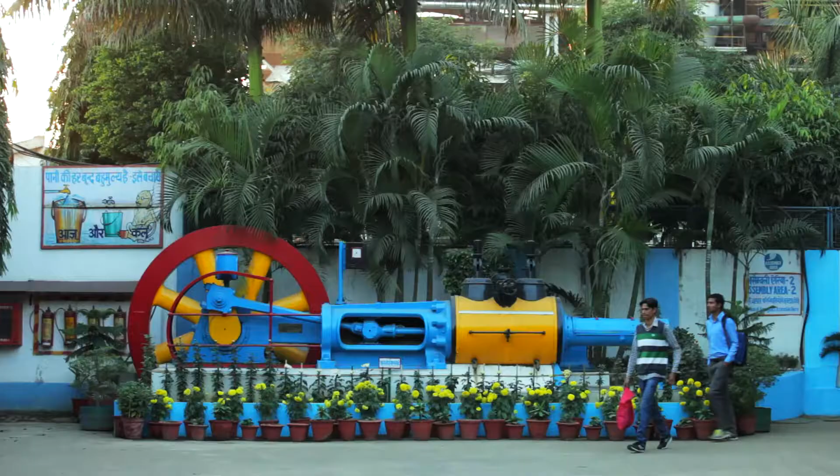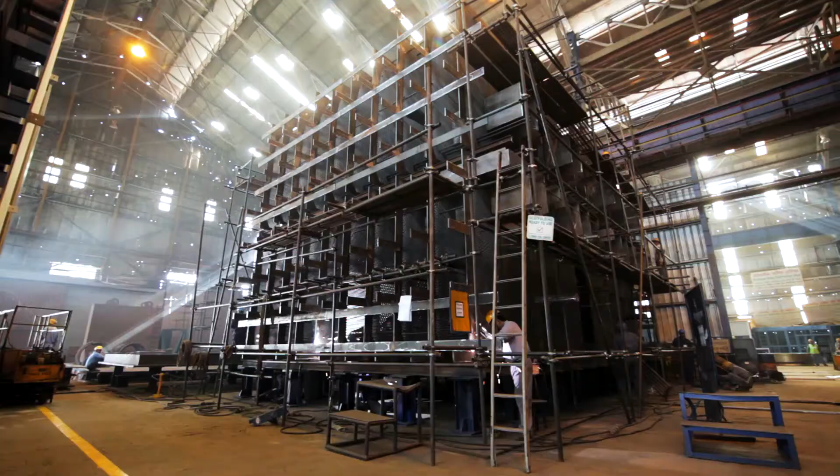Starting from that first sugar mill, this industrious company has marched in step with modern India. As the newly independent nation flexed her manufacturing muscles, Isgec followed suit by building on its success with sugar plants and machinery, including back-end and standalone sugar refineries.

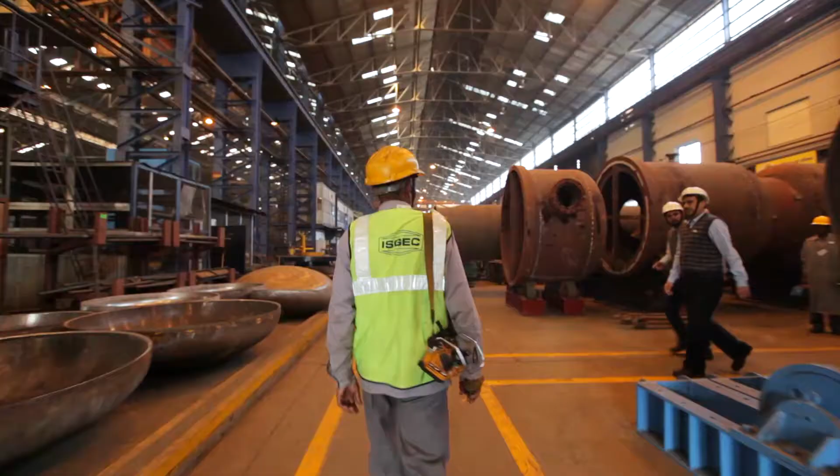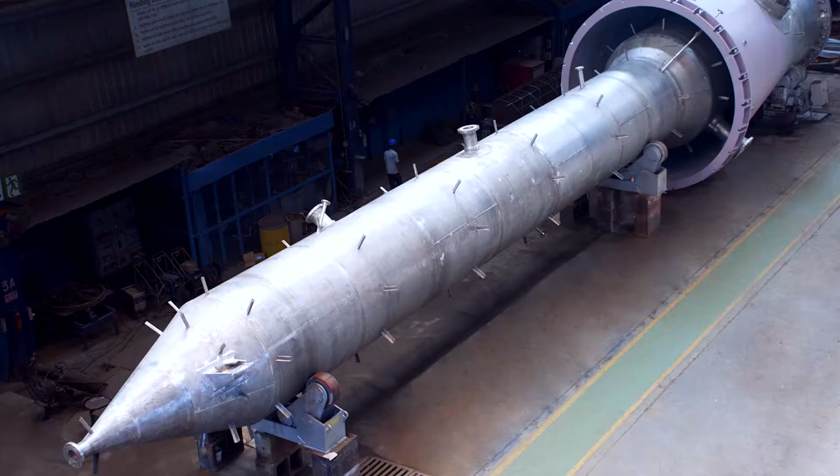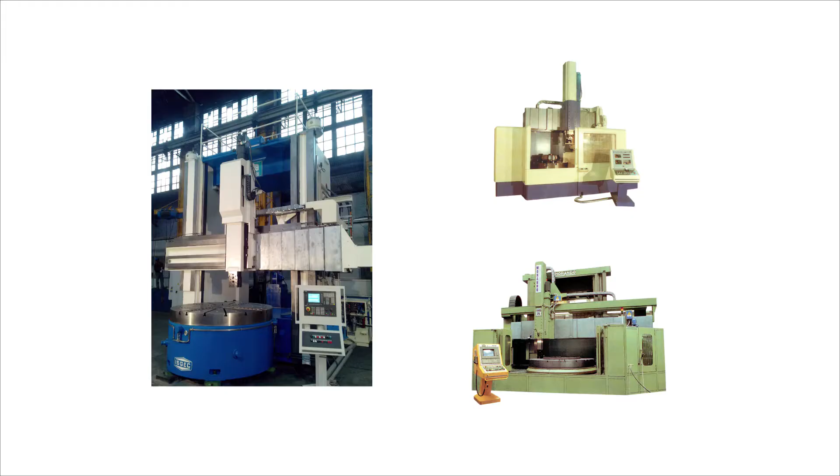Isgec soon diversified into a variety of engineering products, from boilers to EPC power plants, process equipment, mechanical and hydraulic presses, steel and iron castings, air pollution control equipment, metal cutting machinery, and contract manufacturing.

Complementing the expansion of its manufacturing capabilities, Isgec has also extended its geographical footprint. From its foundation at the sugar mill in Yamunanagar, today Isgec has engineering plants in Yamunanagar, Bawal, Muzaffarnagar, and Dahej, design offices in Noida, Pune, and Chennai, and a network of sales and service agents established worldwide.

Isgec has ongoing strategic partnerships with a wide array of companies across the globe: Bosch Projects South Africa, Foster Wheeler USA and Foster Wheeler Spain, Bellelli Italy, ABB Lummus Heat Transfer USA, Envirotherm Germany, NEM Energy BV Netherlands, as well as a joint venture with Hitachi Zosen Corporation of Japan.

The combination of engineering range with international reach has proved highly successful. The company's customers, located in over 80 countries across 6 continents, is a testimony to its excellence in product and project execution.

Isgec has consistently complied with the most rigorous of international quality, safety, and environmental standards.

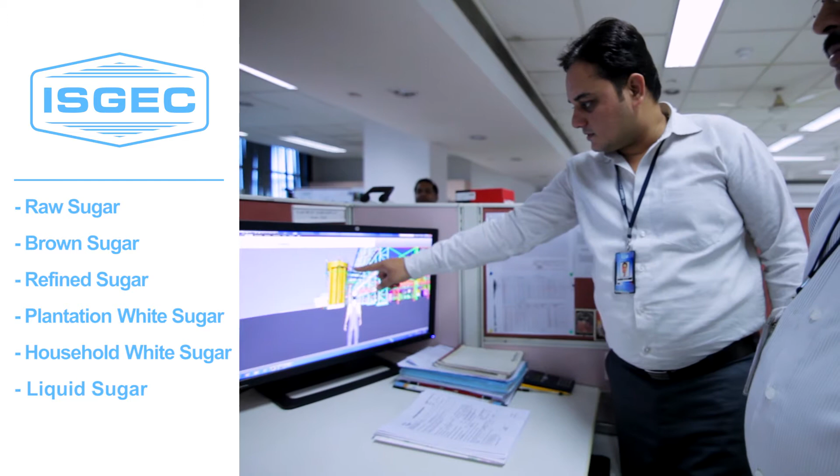Isgec takes pride in its design capabilities, especially when it comes to the designing of process plants. Whether it's for raw sugar, brown sugar, refined sugar, plantation white sugar, household white sugar, or liquid sugar, Isgec has the technical know-how and design experience.

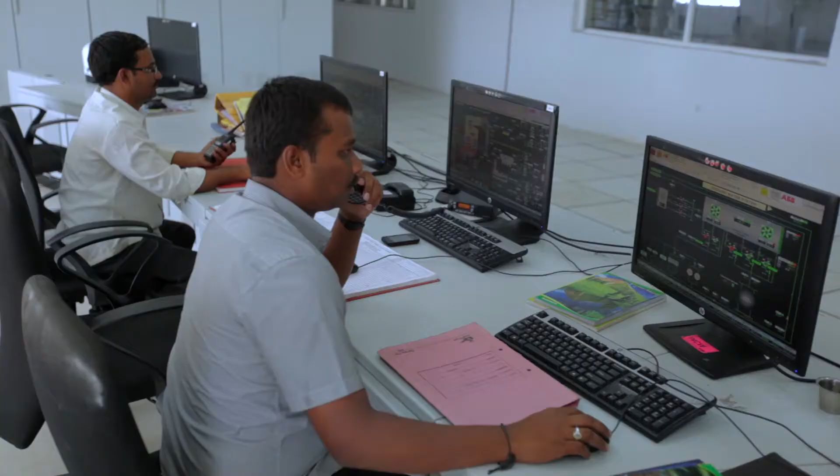While continuously expanding its engineering skill set, Isgec has stayed true to its roots in sugar plants and machinery. In its key business vertical, the company has vast international experience, having worked on over 125 sugar projects, 625 boilers, 30 power plants, and 500 cane crushing mills across 40 countries.

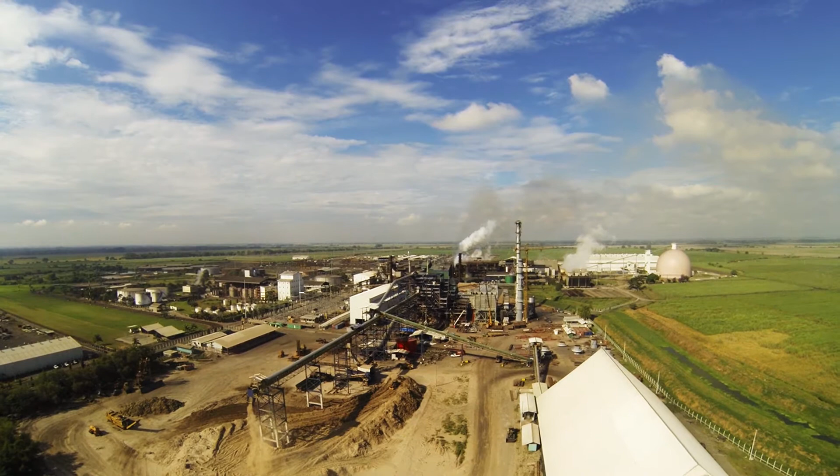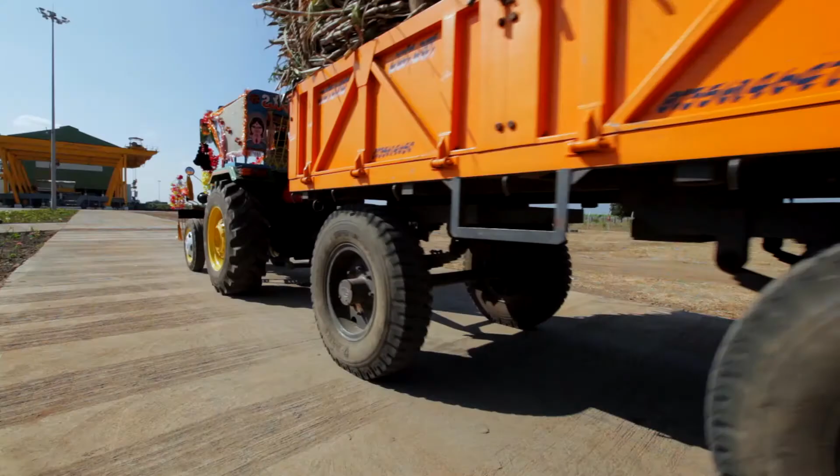In sugar plants, one critical element sets Isgec apart from other manufacturers. We don't just design, build, and install plants. We own a sugar plant and use it to try out our technologies before offering them to our customers. We understand the perishable nature of the crop and the criticality of having the sugar mill up and running on time.

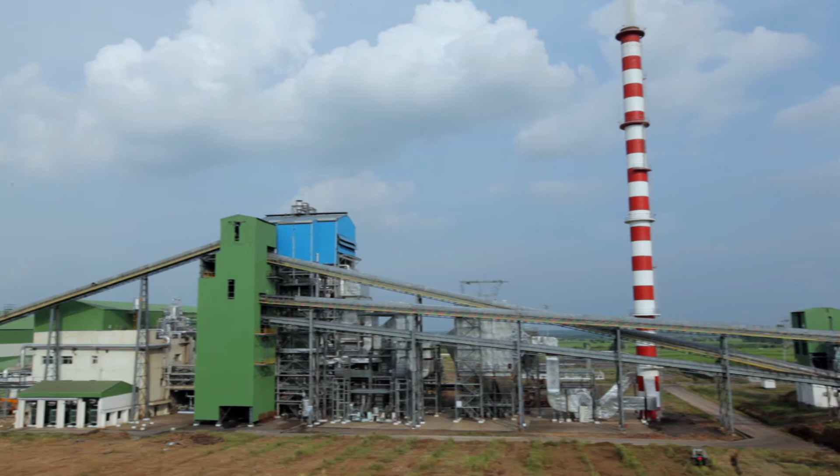Capitalizing on this hands-on experience, Isgec not only sets up sugar plants, but it is also involved with the entire project lifecycle, from feasibility studies to consulting on efficiency improvements, from technical training to after-sales services.

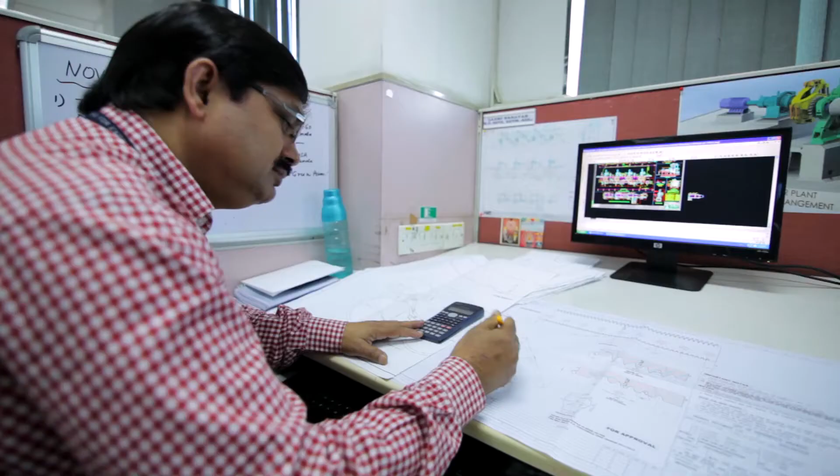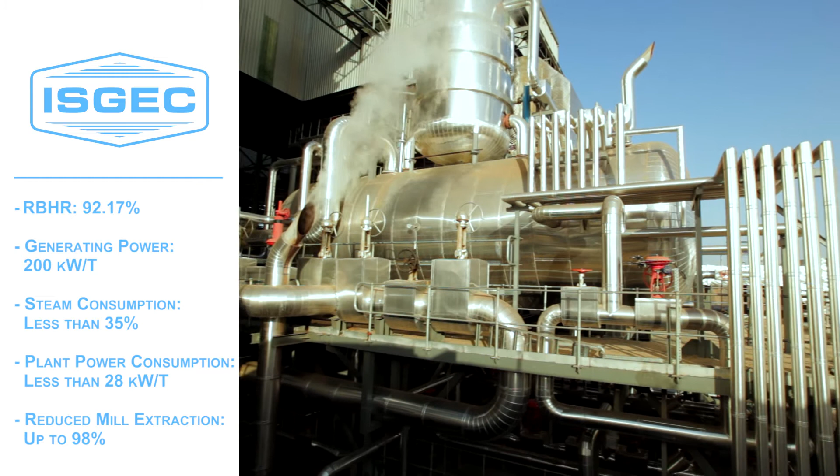Every day across the globe, process plants designed by Isgec are running with high-reduced boiling house recovery of up to 92.17%, generating as much as 200 kilowatts of power per ton of cane, with steam consumption of less than 35%, plant power consumption of less than 28 kilowatts per ton, and reduced mill extraction of up to 98%.

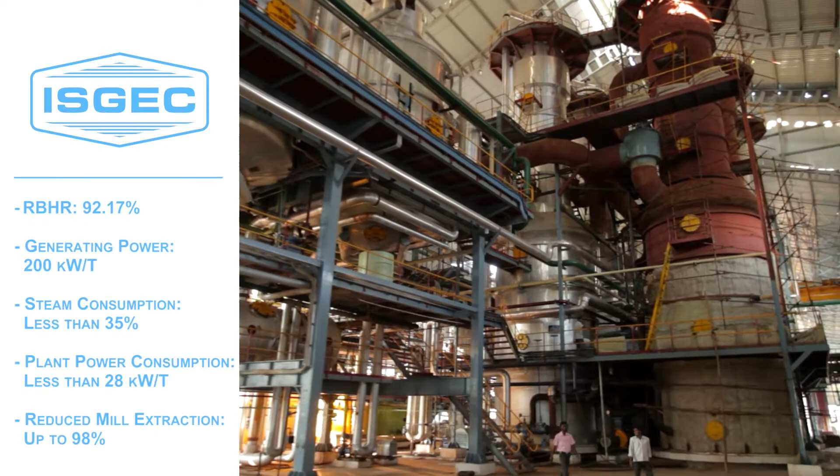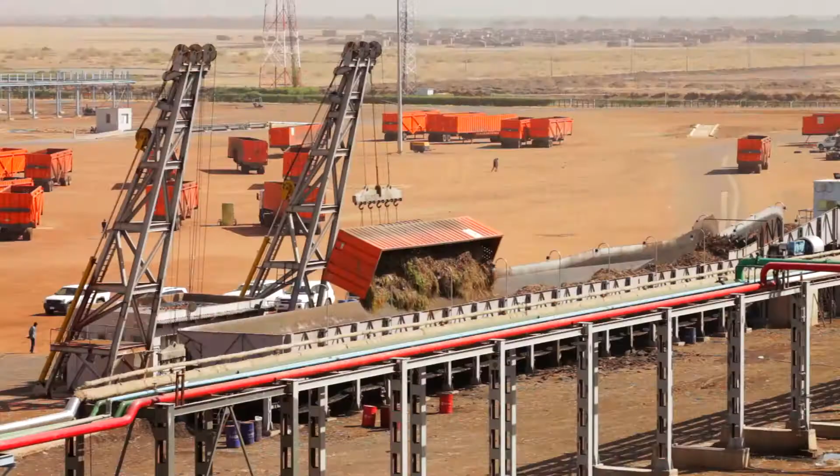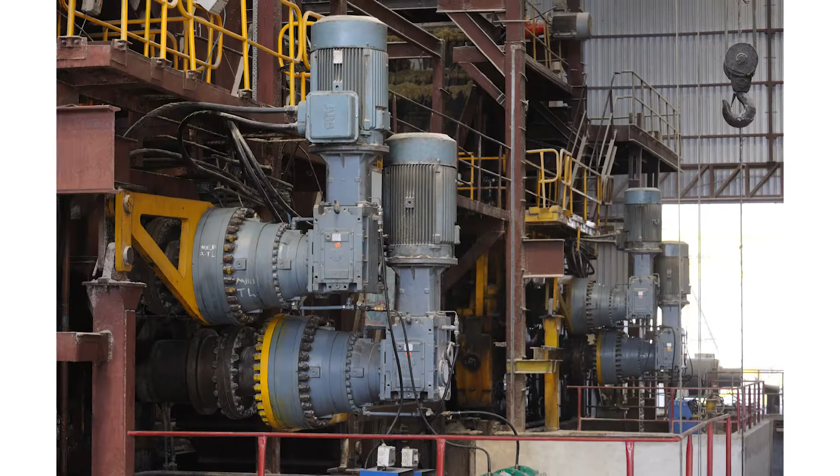In milling tandems for juice extraction, Isgec offers a variety of technical options, from 1,250 to 30,000 tons of cane per day. The company has worked on mills with incline settings, horizontal settings with hydraulic drive, pinionless mills with AC variable frequency drive, planetary gearbox with rope coupling, as well as pinionless mills with assist drive.

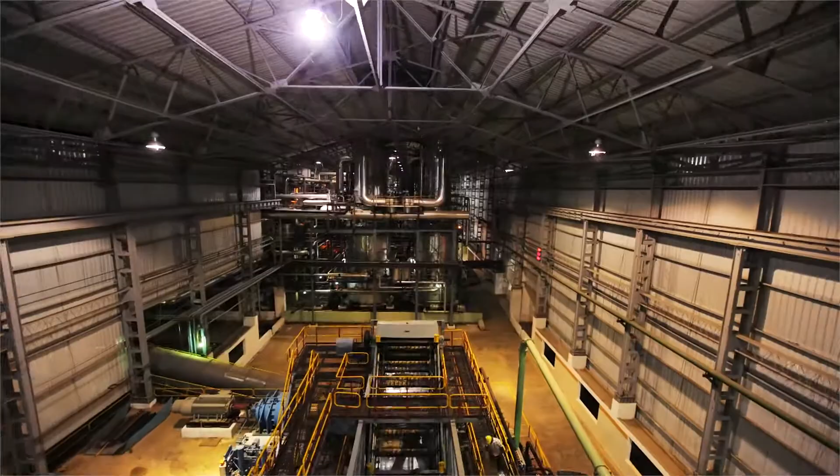For even higher extraction, Isgec has supplied cane diffusers that employ a new low-pressure heating module.

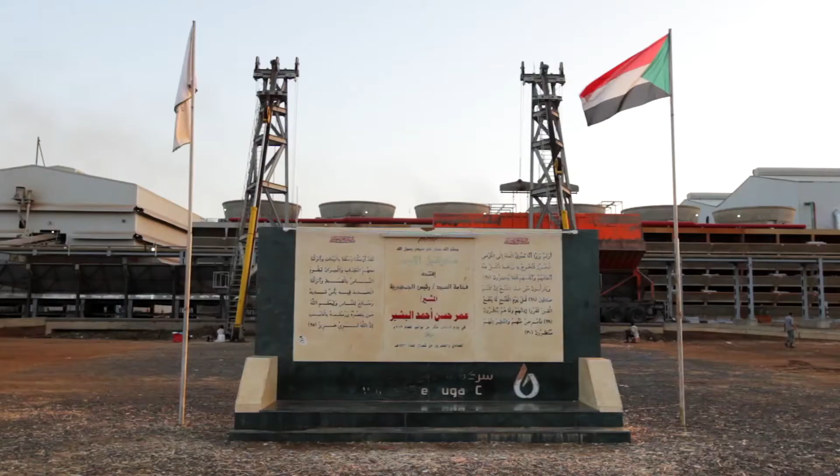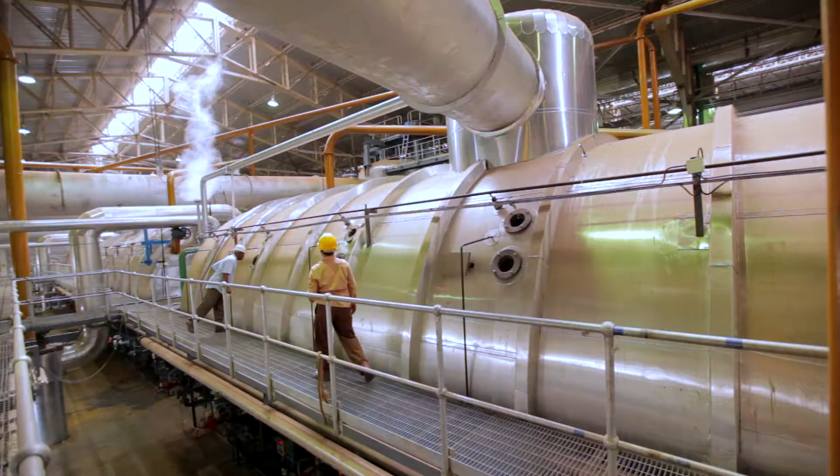At the recently commissioned White Nile sugar plant in Sudan, processing 24,000 tons of cane per day, the full range of Isgec capabilities is on display, from plant design to project execution.

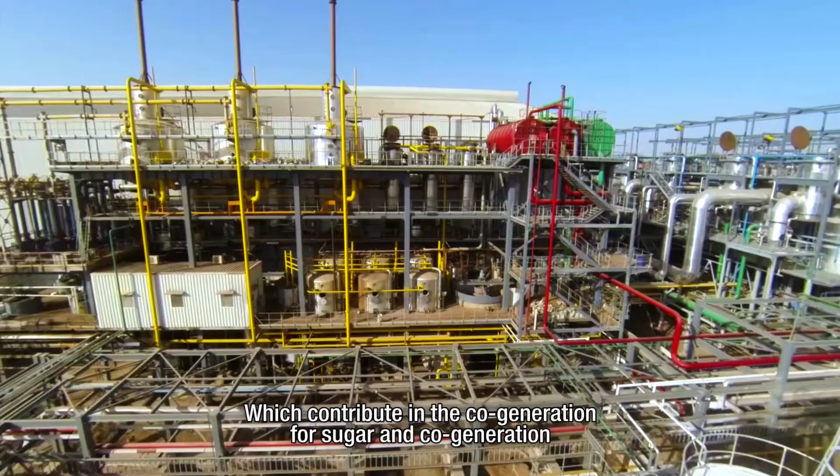This is considered one of the best factories in the world regarding energy conservation, which contributes to the cogeneration for producing sugar and cogeneration.

And all in all, Isgec accumulated in-depth capability to meet the toughest schedule and deliver world-class performance. From the manufacture up to commissioning, it takes 22 months. It is a record, really.

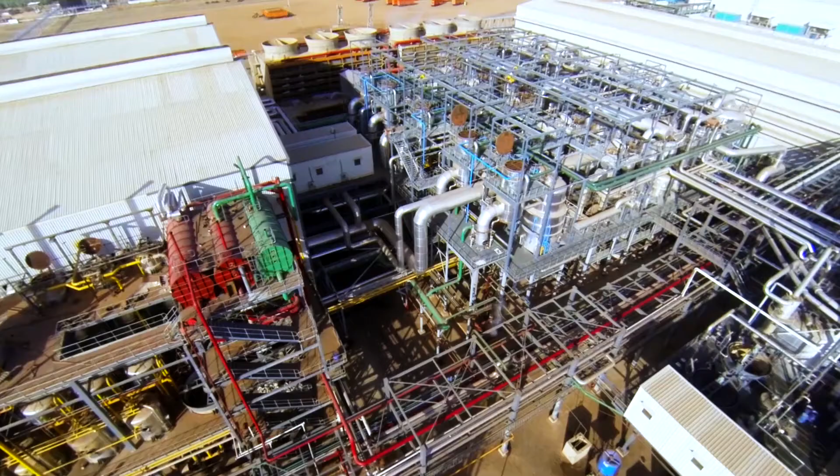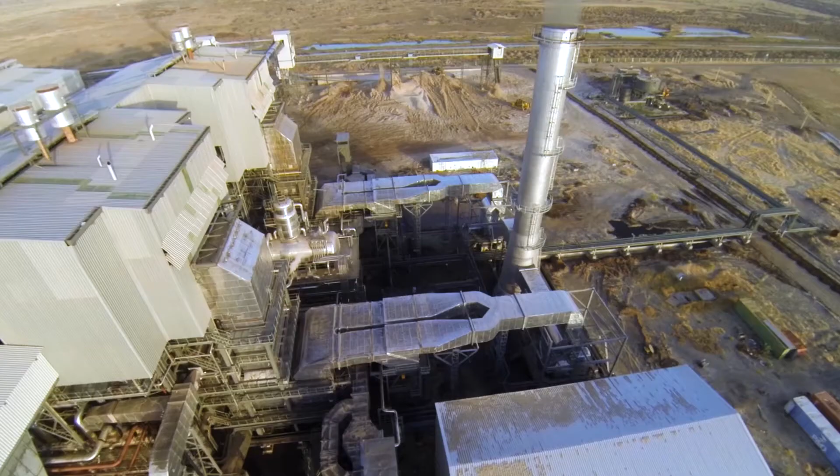With our design and production teams based in India, thousands of miles from the site, the White Nile plant posed a major challenge. More than 30,000 tons of machinery equipment needed to be delivered - almost 1,500 containers from India to Port Sudan to the site.

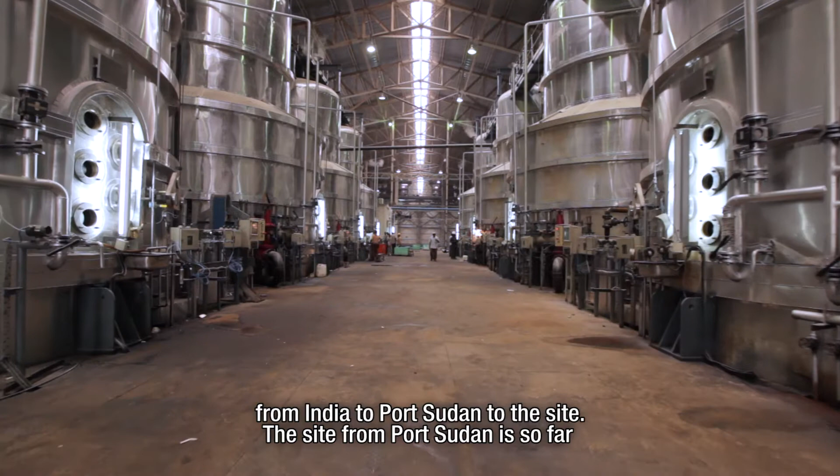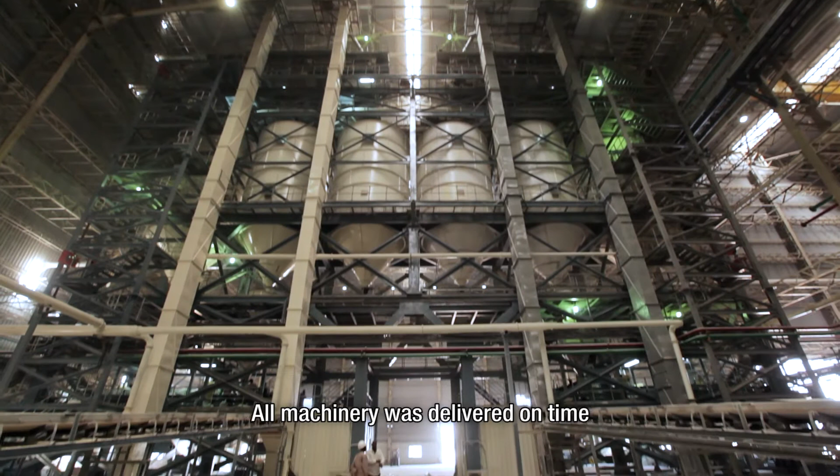The site from Port Sudan is almost 1,200 kilometers. All this machinery has been delivered in time with proper scheduling, proper follow-up, and it's a miracle.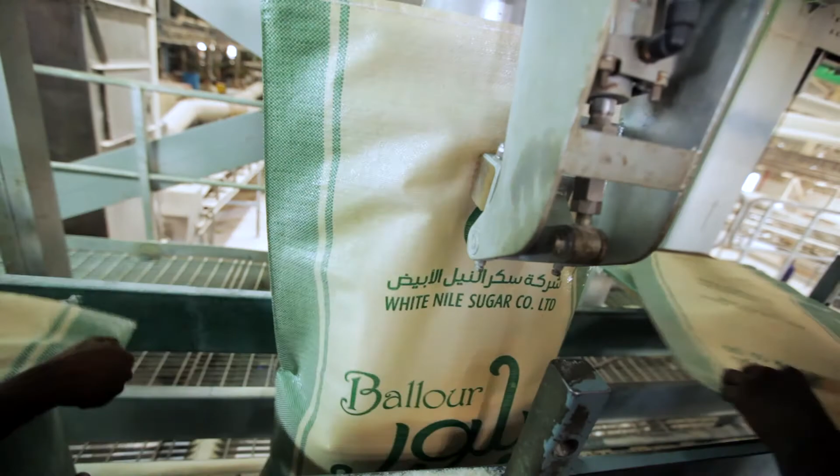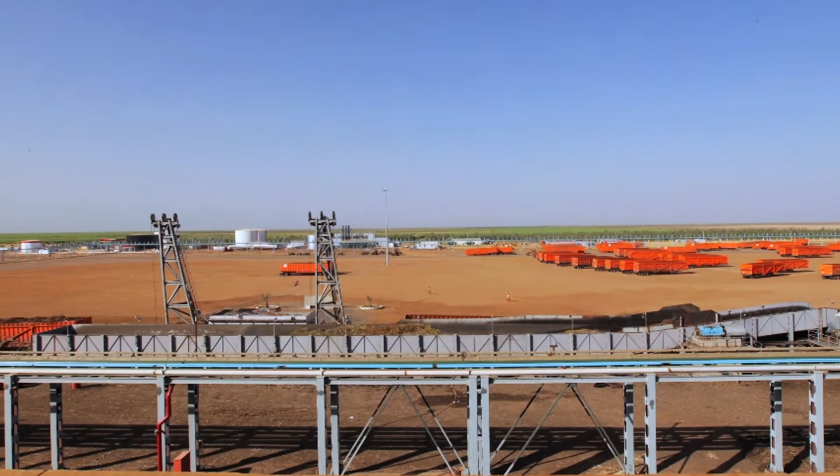With financing of more than $1 billion invested in cane development, logistics, and construction, White Nile Sugar Company is one of the biggest greenfield integrated sugar complexes in the world.

After all the big statistics, everything boiled down to a single key number: one more satisfied Isgec customer to add to a growing list across the globe.

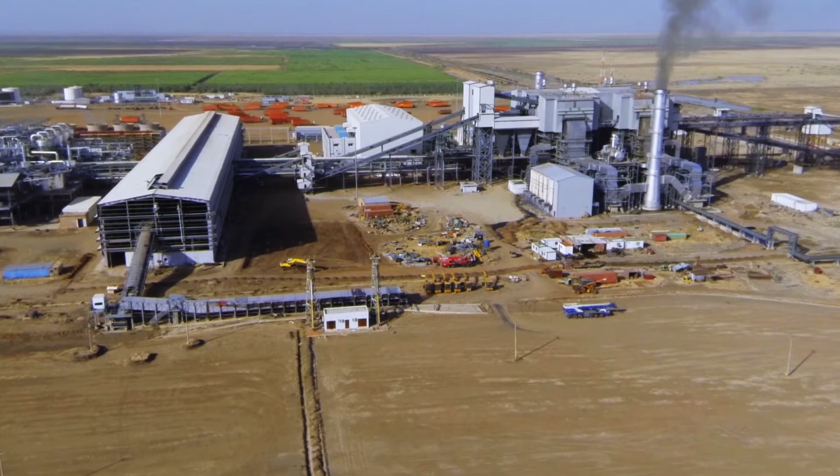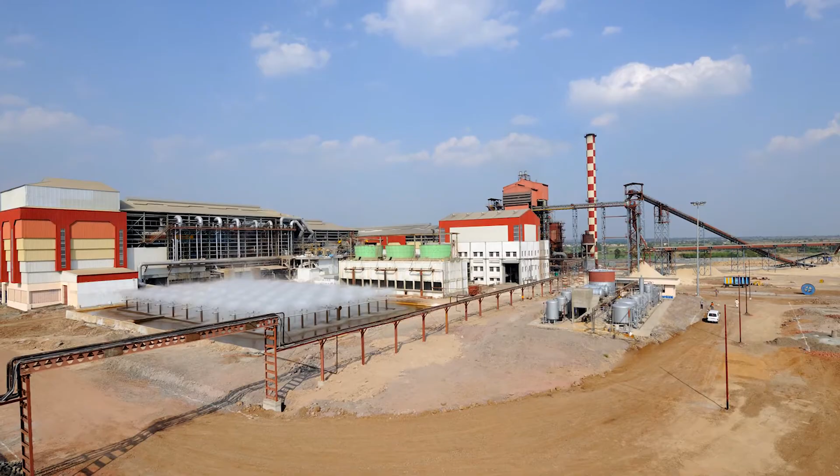But Isgec isn't just about big projects. We have a very large number of small to medium sugar projects, ranging from 1,000 to 5,000 TCD, that have been successfully set up by us. Many have subsequently been scaled up to higher capacities. In many, we have also set up boilers for cogeneration of power.

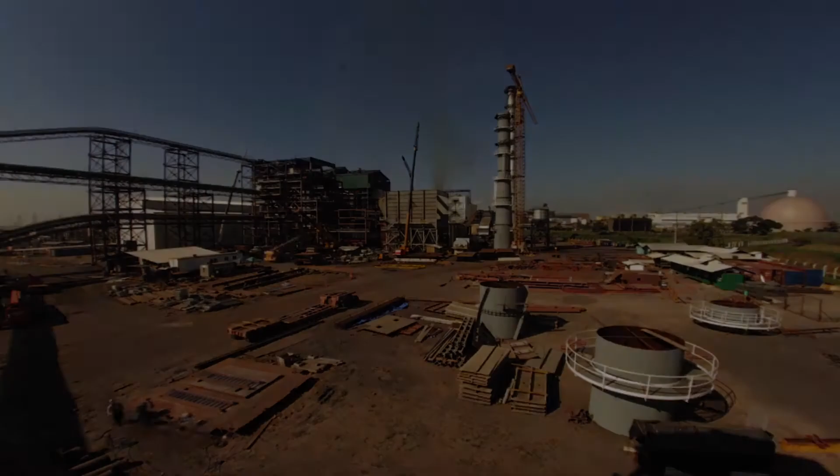Isgec's capabilities in setting up turnkey sugar projects, both big and small, include civil work.

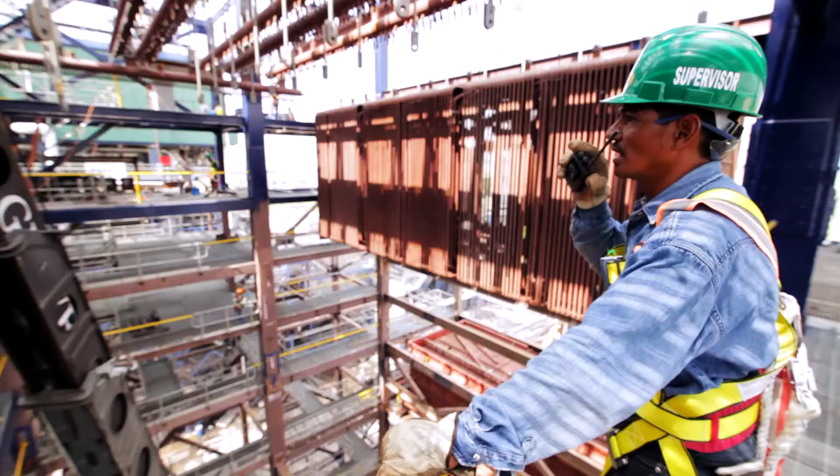Magdalena is the biggest sugar plant in the region, with a capacity of 42,000 tons per day. It's the bigger employer of the country, of the region. So in 2010, continuing with the growth of the plant, Magdalena decided to increase their generation department capacity.

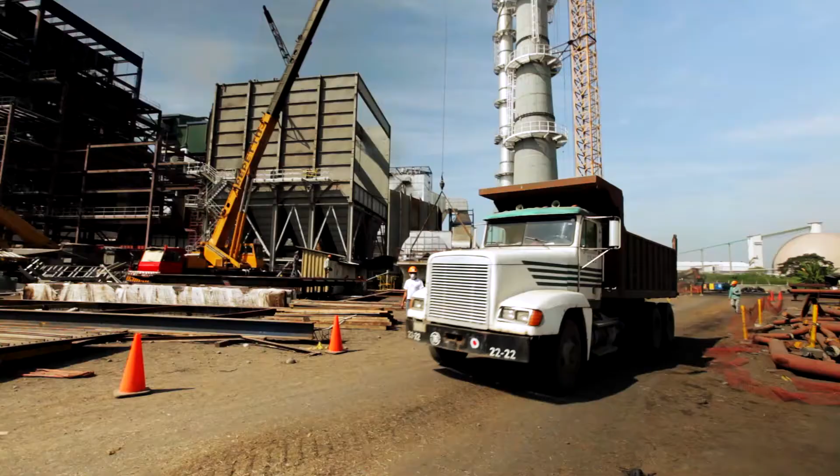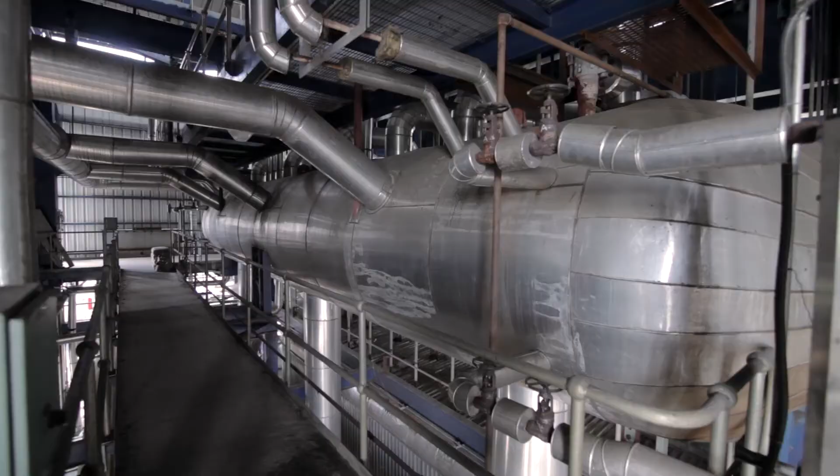So we started to look for suppliers for a boiler, turbo generator, and cooling tower. And during this process, we chose Isgec as an option to be our supplier for the boiler and the whole equipment. They did all the procurement and helped us during the erection and commissioning of our first plant. After that, we decided to continue working with them by buying another 2 units.

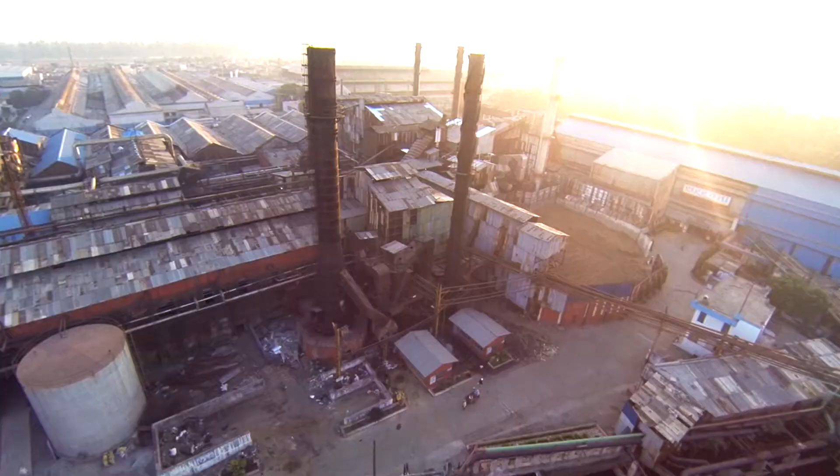From its foundation as a sugar plant 80 years ago, this forward-thinking company has graduated to its standing today as a global powerhouse of heavy engineering.

In the last 10 years, Isgec has executed orders worth over $2 billion, including $1 billion in Africa and $500 million in Latin America.

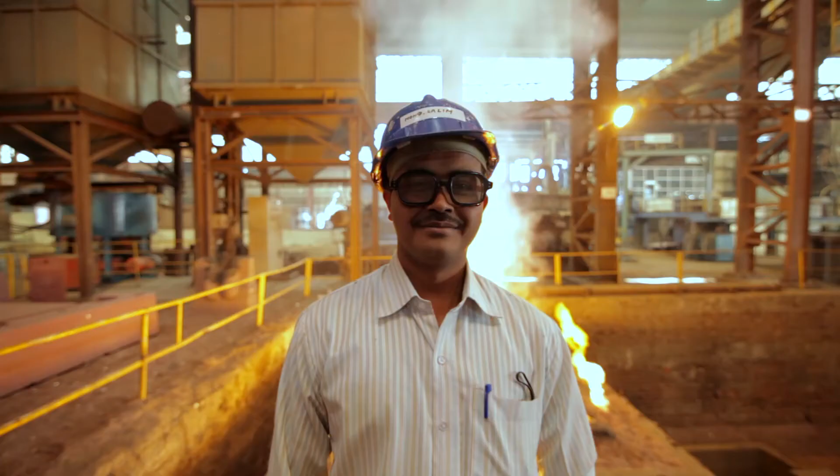With customers in 6 continents and a wide range of industry verticals, Isgec continues to march forward, advancing its technology, expanding its blue-chip client list, and always engineering for excellence.